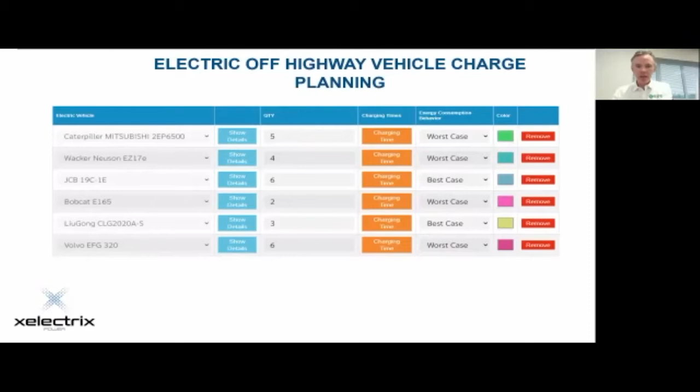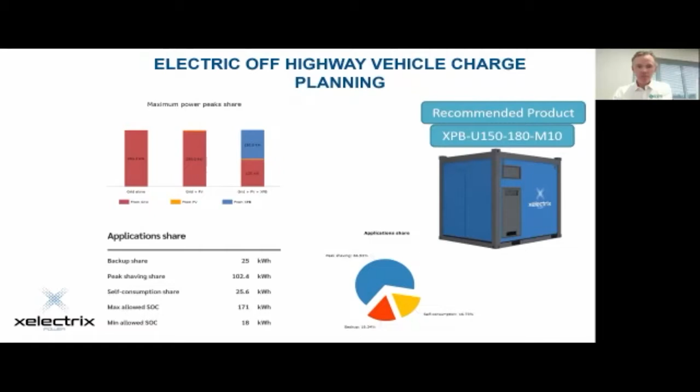As well as carrying out physical trials, another way we can support businesses is using software specifically developed for selecting the appropriate storage solutions for any given application. In this example, we have a business that runs a fleet of electric battery-powered equipment where they need to charge them at specific times of the day, putting a load on their grid that exceeds their current supply. In order for them to support a growing fleet of electric equipment without an increase in grid supply, our software applies this system. From understanding the demand required from each individual machine, we can either produce our own load curve or take one from the client and analyze the data to feed back what size storage system is required to deliver the necessary power outputs to satisfy all charging or powering requirements. From the initial survey and inputting the necessary information, we can produce simple reporting that illustrates the cost saving, payback, and confirm details of the reduction in carbon emissions that can be achieved.

For any business, whether an end user with an existing fleet or someone who wishes to grow their fleet of electric plant machinery and would like some help dealing with the challenges we have covered in this presentation, please get in touch via our details at the end of the slide or look us up via Plant Planet. The move to electrification has started. Let us help you get there.

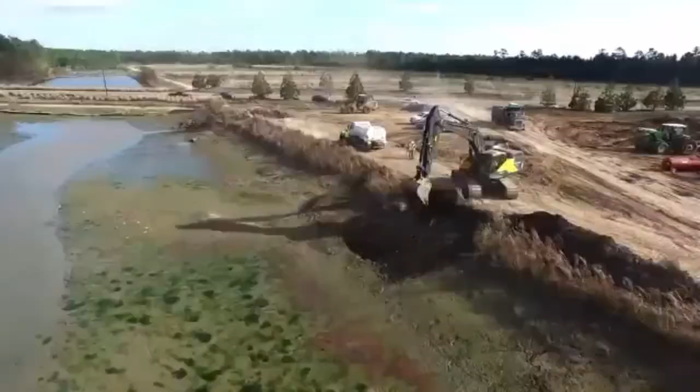Welcome and thanks for joining. I'm Aidan Barnes, Head of Business for SITECH UK and Ireland. SITECH are the UK and Ireland's distributor for Trimble connected construction, site positioning and software solutions, and we support effectively the heavy constructions and civils side of Trimble's product portfolio. We're the leading machine control supplier to the heavy constructions and civil space throughout the UK and Ireland.

And with our integrated construction technology solutions, we work with a really wide variety of businesses in terms of their size, their types, including tier 1 contractors, plant hire, equipment hire, ground workers, earthworks, and rental businesses. And because of the brand agnostic nature that we provide throughout our services and solutions, we're the technical partner of many different organizations of both users and machine types.

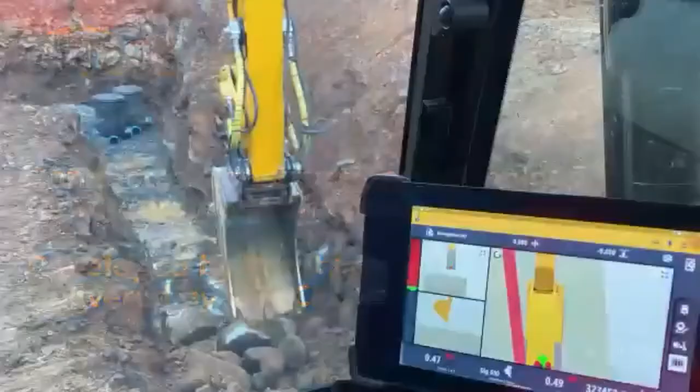So firstly, what are SITECH? What do Trimble provide? SITECH really help customers to develop the technology ecosystems to optimize their work sites in conjunction with their own technology investments and heavy plant or survey equipment. By utilizing Trimble's machine control, site positioning equipment and software packages, in addition to our own professional services or training through the SITECH Academy, we're able to offer the expertise and knowledge base to help customers get the most out of the equipment and the most out of their projects.

Our range of machine control can cover anything from 2D machine control, 3D or 3D automated. This can be on a range of products, whether it's dozers, excavators, graders, milling machine and paving machines. We have a huge, extensive range of product to suit the application, whether somebody's just getting into machine control or if they're really embedded with that technology themselves and are spreading that technology across their own fleet.

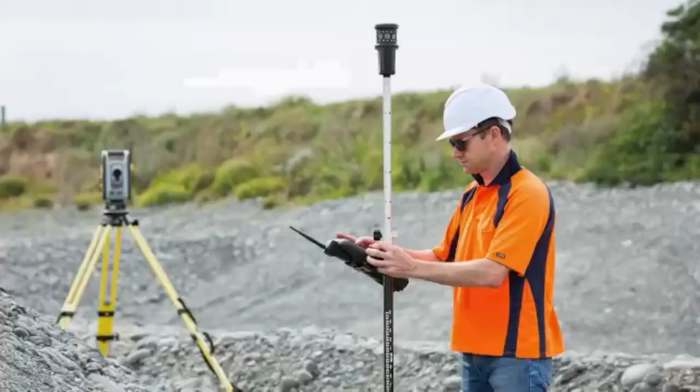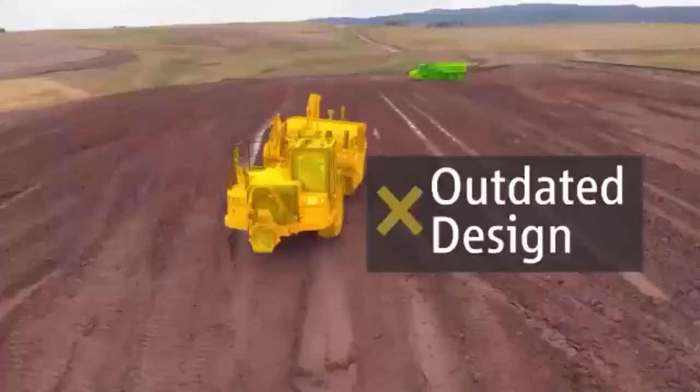In terms of site positioning, we offer a range of total stations, GPS locators, radios, to really make sure that the site can talk to the machine and vice versa. And then in terms of software, we offer a range of both connectivity platforms such as Works Manager, design suites such as Trimble Business Center that helps you design and work your designs to the machine or your machines to send updates designed from the field, then onto Works OS, which is really that holistic package that ties everything together.

So what is a connected site? Well, really, the role of technology in the heavy construction and civil space has drastically changed. Digital transformation, Internet of Things, and data connectivity and data flow is happening right now. So what exactly is a connected site and what does it mean for your construction project?

Firstly, there's no defined term. It can mean anything from machine control on site to a full office-to-field and field-to-machine, minute-to-minute update connectivity solution. We can go as deep as we wish, or we can keep it quite top level.

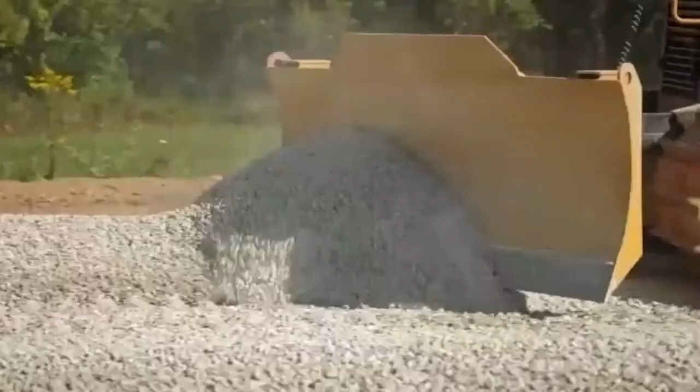It might surprise some people to learn that machine control has been used since the late 90s. But like any technology over the last 20 years or so, it has evolved quite significantly in some instances. Organizations, in our opinion, must embrace it or have to start looking at it if they haven't done so already, really to be able to be competitive in the market.

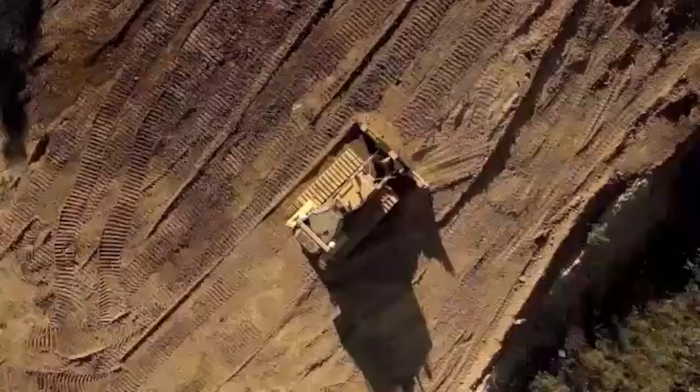Further to how the technology has evolved and the benefit it brings, it's its accessibility. So for many contractors adopting machine control, it's the first step to automation of the work site.

But with the growing pressures across the industry, especially since COVID, and as we've become more remote in terms of our working practices and activity, the industry has had pressure on it to adopt and adapt to these new ways of working, really to get the best out of the efficiencies of the projects, but also people.

Organizations, in our opinion, now must embrace it in order to be successful. And for those that don't, they're starting to see the cost challenges and considerations that must be made. So for many, it's becoming the standard requirement to meet in terms of our clients, and productivity, safety and sustainability.

So to that end, it's not just about adopting one type of digitization—machine control, positioning or software. Whilst it has the potential to meet these challenges, it also has its limitations.

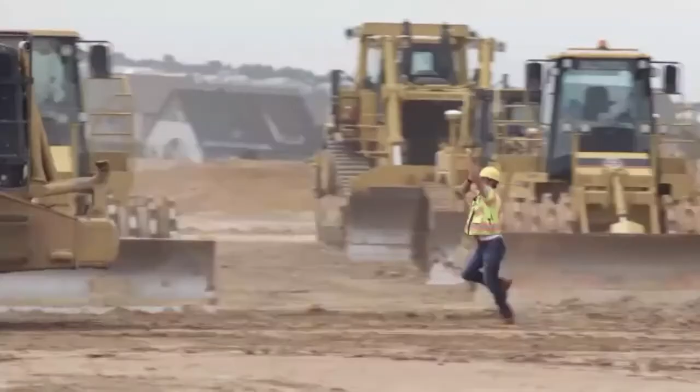So as an example, when we talk about a connected site, the designs can sometimes mean that we have to update machines manually onto each machine. And there's the possibility of those going wrong when wrong designs are uploaded or design changes are out of date—it can cause a problem, with no indication of the error until the work's completed.

Again, what we're seeing in other scenarios is where an excavator is consistently collecting data, which can be turned into invaluable as-built insight. It's simply not being collected or used. So when we do collect it, how are we using it? Are we getting the most out of that data and that information?

Or we see certain customers aren't working to the latest design, or the surveyors and project managers are making changes, so rework's got to be done. So how do we then take those foibles of digitizing and connecting some of the equipment to make sure the entire site is connected, and we're getting the most from all aspects of the connectivity?

Because when we see businesses, surveyors, or designers, or other people really embrace the connected site and move out of their silos, we get past the limitations of the ability to be efficient, to manage the project, or to make the best use of data.

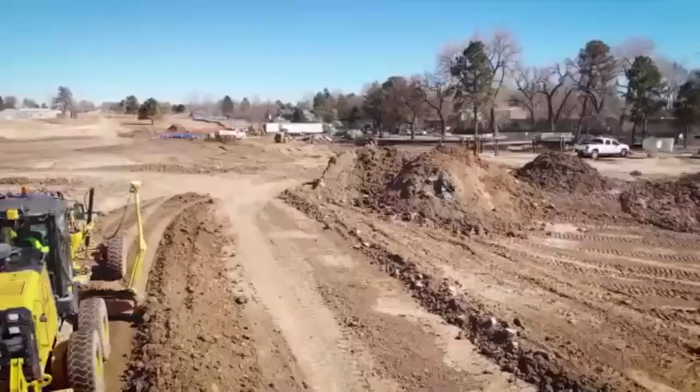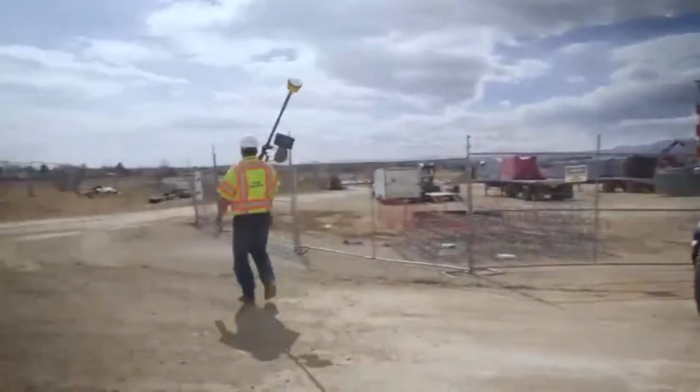So what's the solution? Well, our solution, Trimble's solution, and what we're seeing all our competitors do, is really to make sure we're using construction technology across a connected site to create the integrated work site. It's a concept both as simple but as powerful as it sounds.

So at all phases of a project, all essential team members, whether behind a design desk or behind the controls of the machine, are all seamlessly linked.

So for Trimble, we utilize Works Manager, which connects all the different sites across. Whether it's using GPS 3D, or base stations, or total stations to send data from machine to machine, it gives a seamlessly linked system across the work site to ensure the most current, complete data is available. Everybody's aware of the progress via two-way data connectivity.

That's automatically, wirelessly to everyone at all times. So by connecting the machine control to the workflow management, you can take full advantage of the data generated in the field. The connected site should be viewed as a construction ecosystem, and it really hones in on our ability with data, if used efficiently and smartly, to get the most out of our investment.

Let's be honest, a lot of this equipment isn't cheap, but if we look at the benefits it drives, in terms of cost savings of people, error reduction, wasted material, fuel saving, it really does provide us with the information we need to justify those investments.

It's especially useful if we look at contractors working on multiple work sites or projects. If we need to see everything connected over the site, we can look at job completion dates, when we can move on to the next path, if we need to allocate resources to a different site over and above, or if there's certain things going wrong where we need to put specific specialists into a site in advance to meet the site deadlines.

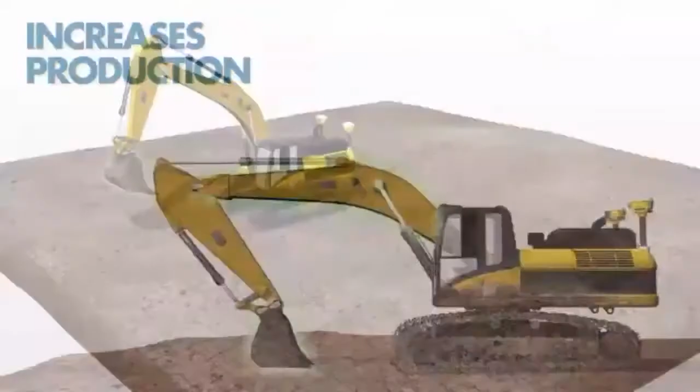And the way we do this at SITECH and Trimble is we build all the equipment and technology from the ground up, dedicated to the construction industry, but with very good knowledge and understanding of both the geospatial aspect and the BIM modeling, so that it's the connection right at the heart of it all, but it transcends throughout effectively from a greenfield site to the actual completed works or project.

A recent study by McKinsey Global Institute around the industry itself suggests that by adding the technology to create a connected construction site, it can reduce the overall project cost by 4 to 6% and increase, as I said earlier, by as much as 30-40% depending on what it is.

The next area is just error reduction. It's a key area within construction, and error reduction is all about ensuring the job's done right first time, every time. And if we look at accuracy and quality, by automating project workflows and delivering the highest possible accuracy for site positioning, setting out, and measurement of machine control, it really does enable us to save on errors.

And also save then on the rework of them, going back to the previous point of time saved, cost saved. With rapid updates of two-way data, we're able to minimize the chance of work being carried out that isn't correct, or if something's changed on that day.

It gives us better visibility, as we said earlier, in terms of the project information, and it's readily available to the office, which can be given to a client in terms of progress update, or even making sure everything's working to plan, or spotting potential hazards or pitfalls.

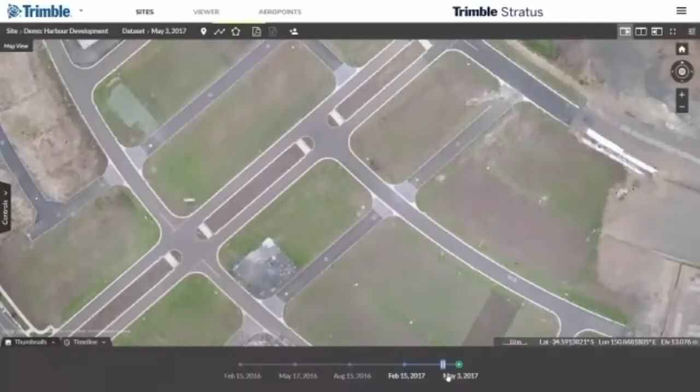And then with the up-to-date insight of data, the data can be used proactively, looking at what's to happen next, or retrospectively, what could have gone well, as I said earlier. So it really does help us drive better, more articulate decisions.

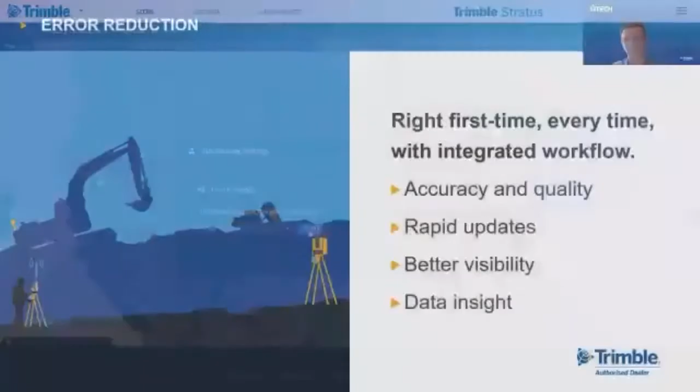On to cost control: another area that's really important to SITECH, to Trimble, and our customers, is our ability to improve the cost efficiency of the projects. If we look at it in terms of estimating, by utilizing the knowledge, we've got less error, we've got more accurate understanding of what materials we'll need to build.

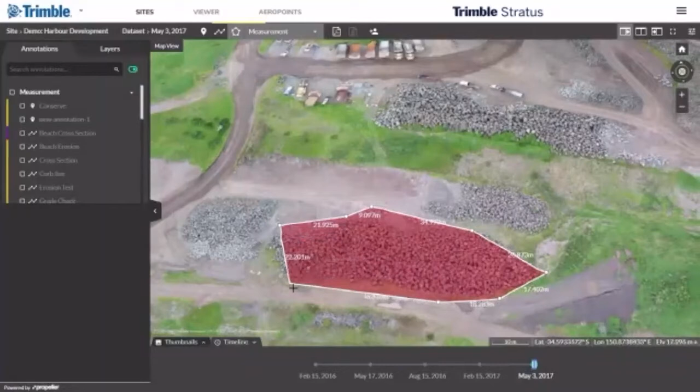We don't have to build in as much budgeting for these deviations or the discrepancies. And it means we can keep on track of budget through the planning and the progress tracking throughout.

Waste throughout the industry is probably one of the key focal areas of the business, and machine control and the connected site really enables us to hone in on that detail. All this then also helps really cut delays.

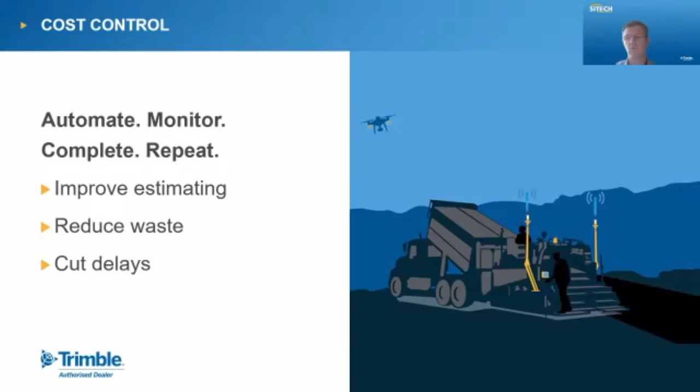Whether it's machine downtime because you've got reduced service frequency, replacement of wearable parts, less overdig, so the job's right first time, it's a much smoother workflow, and the resource planning can be far more accurate than ever before. That's both in terms of the operators, the equipment, and the project. We're far more streamlined throughout all the different components of a project.

And finally, we come to competitiveness. All of what I've said above, all our competition know that we've got a vast array of products, both machines, both site positioning equipment and software. But it's really about how we as organizations, and specifically contractors, subcontractors, plant hire, can become more competitive. It's there to ensure that you're ready to compete at all times and ready for the new activity now.

We need to be able to make sure we can win more work. By being more cost effective, jobs completed on the right time, and using information to stay one step ahead of the project, we can stay one step ahead of the competition.

And with our ability to be more competitive, we've got better margins. So if we look at it, and I use the term 'we' because it is a partnership with our customers and also the technology providers, we're all looking to improve margins. And with better cost control, we're able to better price customers without sacrificing the margins.

Actually, we're all going to benefit out of this, both in terms of the end customer, our operators, the clients, the project managers. It's all deriving around better control. And part of that, quite simply, is just by completing jobs faster.

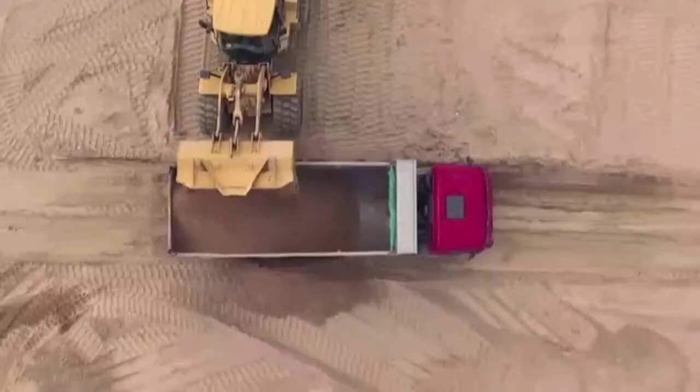If we look at the comparison of a technology job where we've used machine control or site positioning versus those that don't, those technology savvy customers really have seen the improvements that it provides them without compromising on quality. And by embracing this digital transformation that's happening right now, and will continue over the next few years, it's a great opportunity to be within the industry and really take advantage of the benefits that it brings and future-proof organisational success.

So that's just about it from me, and it's probably time to wrap up. But I hope that this discussion has given you the opportunity and the insight in terms of what a connected site can do for you. A connected site is, and really should be viewed as, the contractor's secret weapon for improving productivity, safety, and our ability to compete. So the question to our customers is, what are you waiting for?

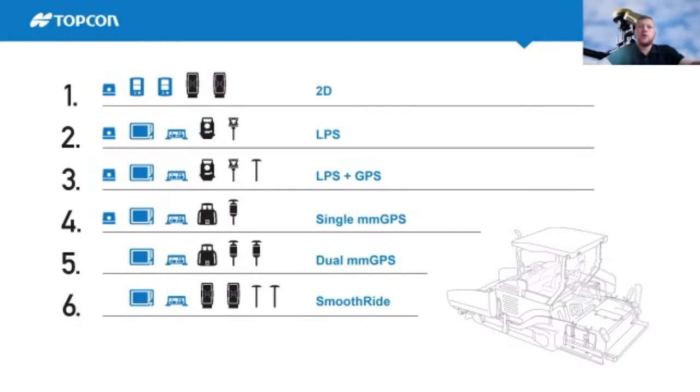LPS GPS is a hybrid of both options between LPS, so total station, and GPS. Single millimeter GPS, which is an exclusive product here from Topcon. Dual millimeter GPS, which is also again an exclusive product from Topcon, and SmoothRide, which I'd like to talk to you about today. That's also an exclusive product from Topcon.

For those who don't know, 2D machine control is a common product in the UK, and it consists most commonly of a 2D sonic tracker. The sonic tracker references to the ground and controls the tow point of the machine, adjusting the level. This is an automatic machine control solution.

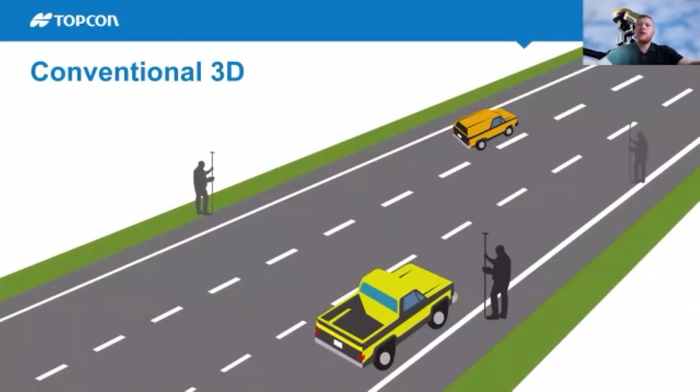LPS machine control, via total station, is the most common 3D choice in the market at the moment. The problem with LPS machine control is the surveying aspect, not only during the paving or milling operation, but also during collecting the data. It means that someone has to be on site during the paving operation and also during data collection with a total station, so during live traffic.

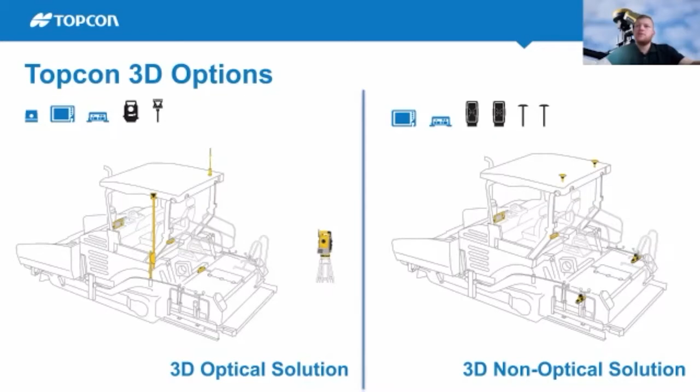The optical 3D solution via total station is on the left and the non-optical solution is on the right. We use GPS position, and with 2D, it's a hybrid option between 2D and 3D.

The non-optical benefits are: no requirement for a total station on the job site, and no on-site surveyor needed. This means we have fewer employees on the site and in between heavy plant. Normally during the paving operation, someone would have to be behind the paver with a surveying kit to verify what the paver is actually laying. We remove all that.

Limited setup of equipment means there's no need to set up the total station equipment - all the equipment stays on the machine. We would just turn the machine on at the start of the shift, and as long as we have a GPS signal, everything works with the conventional paving method.

It also works better in different weather conditions and at night. One of the issues with LPS and optical equipment is it has to have line of sight, and during wet and cloudy conditions it limits the accuracy of the paving and milling operation.

This removes the total station range and obstruction issue. A total station and an LPS operation has to have line of sight, and there is also a range limit to a total station, so if we have an obstruction issue, it can cause problems for the machine. We remove all that with Smooth Ride.

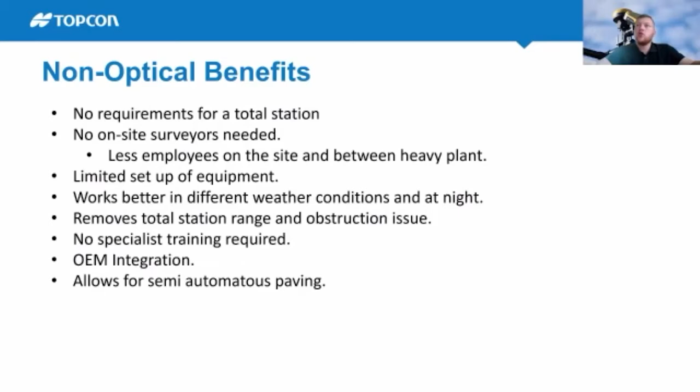This allows other operators on the paver or milling machine to do other jobs - whether that's keeping them out of harm's way off the site, or allowing them to operate other bits of plant on the job site - which enables semi-autonomous paving. I can talk to you more about that further in the presentation.

So really for us, what are the benefits to profile planing and profile paving? We get a smoother road for the road owner, a smoother IRI, International Roughness Index. That removes extensive pressure to the asphalt, causing an irregular surface, and increases the lifespan of the road. So if we can increase the smoothness, it's less pressure and less wear on the asphalt, and it's also less wear on the vehicles traveling over it.

Strategic planning - scanning can be done without road closures and at night, and I can talk to you a little bit more about the process and what we can offer.

Scan data allows for analysis of the current condition of the strategic road network. Scanning can be done at regular intervals, so we can see deterioration of roads, and we can also see potholes, and then create a strategic resurfacing plan based on factual data - rather than ripping up perfectly good roads.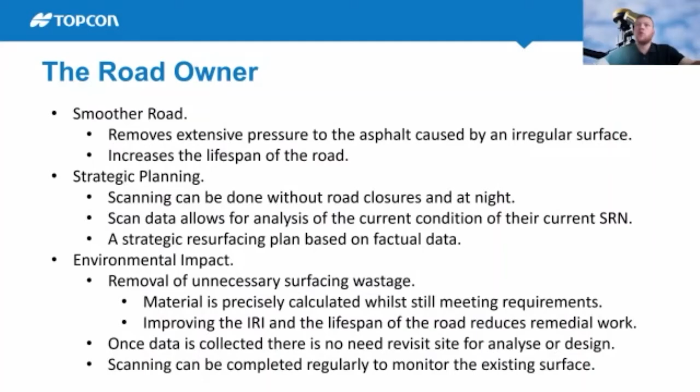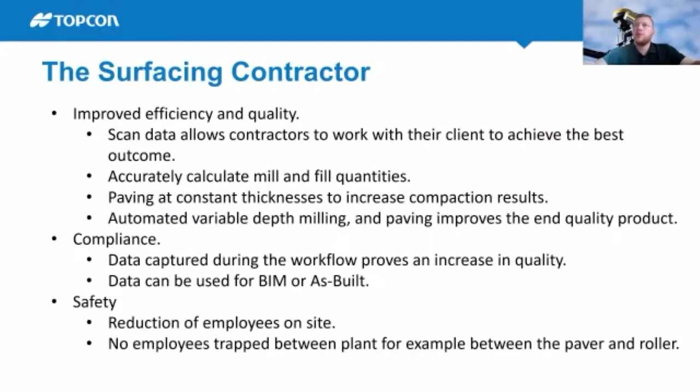Safety - the reduction of employees on site, which is a key perspective for safety. No employees trapped between plant, for example, between the paver and the roller. Conventional methods need someone to be in between that paver and that roller, which we want to reduce and remove.

So for the consumer - that's all of us, everyone that drives on whether it be a Highways England strategic road network or a council road - it's a smoother driving experience, a safer driving experience. There's been multiple occasions where IRI is taken to a dangerous level on some of the strategic road network, and we want to be able to remove that.

Improved MPG or distance for electric vehicles, which Highways England are severely keen to promote and push, as electric vehicles are a lot more common now on our roads, and they want to get the most miles per charge. One of the prime factors is improving the IRI, or the smoothness, leading to less wear on the vehicles, suspension and drivetrain.

Less road closures, which is a key point. Our workflow allows us to collect the data during driving speeds, which means that there's no need for road closures.

So what is Smooth Ride? Smooth Ride is a workflow. It starts from data collection to design to milling or paving, compaction, and then back to scanning.

I've just got a quick video that I'd like to run through.

The first requirement is to get an accurate depiction of the road surface. Our road surface scanner gathers a precise map of the entire surface at normal highway speeds, collecting the data you need with more information than a survey crew could provide.

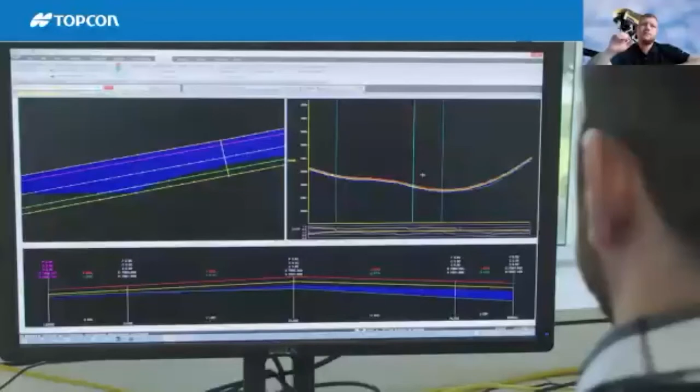The next step is to create a design that meets the tolerances and specifications required. Optimizing and customizing the millions of data points necessary for creating your design file is made easy with Magnet Road Resurfacing software.

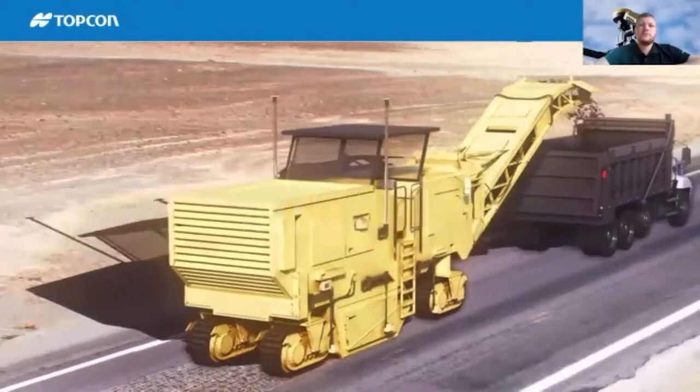Once the design is created, it is sent directly to your equipment, allowing milling and paving to begin almost immediately. Equipped with our 3D machine control, the milling machine knows its position on the road at all times.

With automated, variable depth milling now a reality, you can mill to the exact depth necessary, creating perfect mill-to-fill optimization and the smoothest surface possible for your paver to follow.

Material costs can quickly turn profit to a loss. Paving with Smooth Ride assures rideability while eliminating waste and cost overruns. By managing your material properly across your entire project, you'll never be too thick or thin.

Utilizing the same job files generated for your milling and paving machines, operators know exactly when and where to compact, which prevents over-compacting and increases efficiency.

Advanced temperature sensors inform the operator exactly when to begin, and the touchscreen control box keeps track of how many passes have been made. As your compaction processes are in action, your rollers are gathering as-built data on the road surface. As more DOTs require intelligent compaction standards, Smooth Ride will keep you miles ahead.

So that's just a quick overview of what Smooth Ride is in the workflow. As we mentioned, it's a hybrid between 2D and 3D machine control.

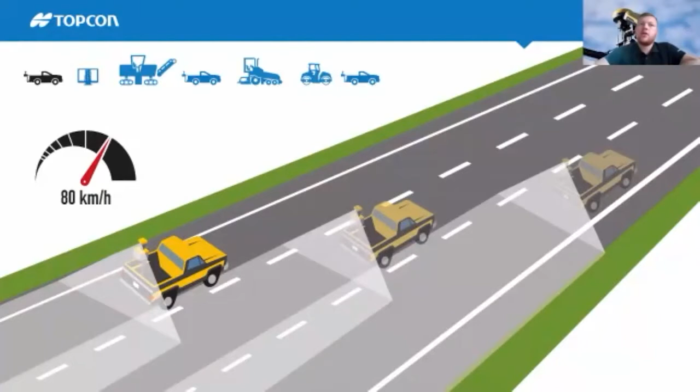So we can scan at 80 kilometers an hour, which is about 50 miles per hour, and that can be done in lane 1, lane 2, and lane 3 of a motorway, for example. So we can keep up with traffic, and our data that we collect can be automatically filtered to remove things like passing vehicles.

And whilst we're collecting that data, our software allows you to see a really good picture of the data that you've been collecting. So if you miss a particular point or a particular spot, you can go back around and collect that data again.

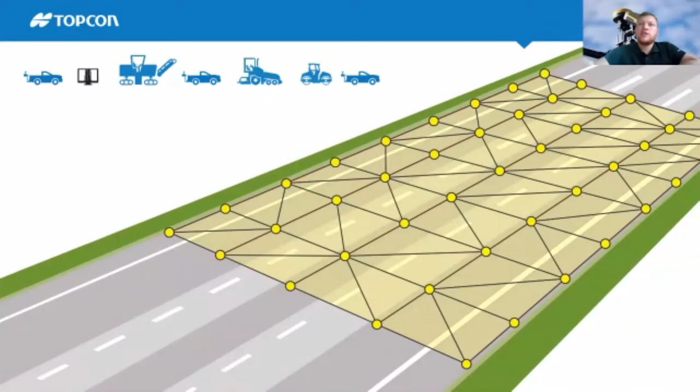Out of those millions of data points that we collect, we create what you call a DTM, which is a digital terrain model. And from that digital terrain model, we then create a design, which goes directly into the milling machine or the paver, depending on which is the most likely option for the client or the contractor.

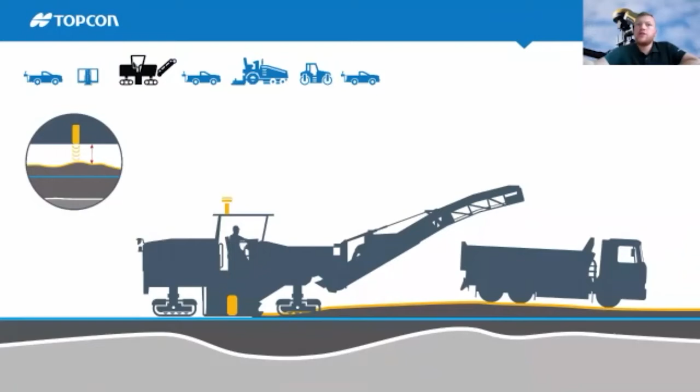So once we have that milling operation or that design, we do what we call variable depth milling. This allows us to create a completely flat surface ready for the paver to then lay a nominal thickness over the top, and it's becoming very, very desired in the market.

Once we've variable depth milled, we can then scan the existing, milled surface again, and go back with smooth ride paving. Or, as I mentioned, sometimes we cannot always be in control of the milling operation.

We can scan the existing surface, whether it be an undulated surface, and then we can variable depth pave back, which gives very similar results, if not better than an averaging beam.

And all this time, because we have the existing surface, our software allows us to tailor the requirements so that we don't overcompensate on material.

As mentioned in the video, once we have the data that's been collected, we can put that into the compactor, and the roller will then say exactly where to compact and where not to compact to meet the full requirements.

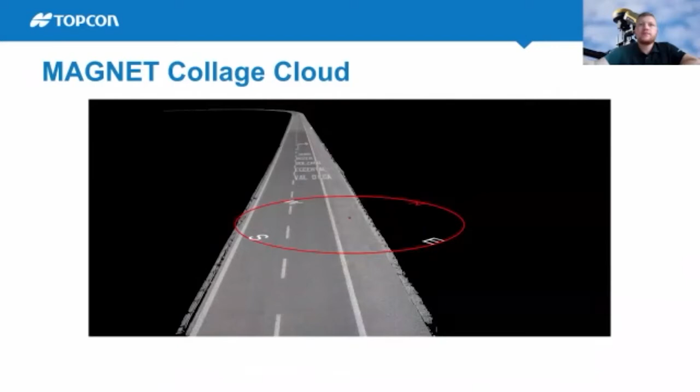As I mentioned, we put that into a DTM. So that's the DTM from that point cloud.

And then we put that into our Magnet Office resurfacing. Our Magnet Office resurfacing is a really good software. It gives you plan view, profile view, and cross section, which is really important to be able to look at cambers, water drainage, etc.

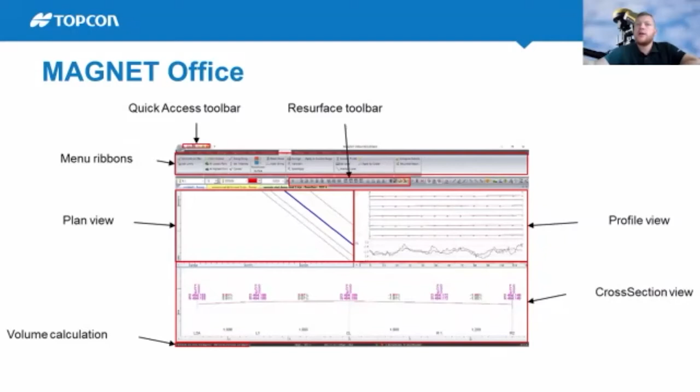All the time that you're making these tweaks and specifications, in the bottom left-hand corner you can see the volume calculation. Every adjustment you make to the milling or paving design will change that volume calculation.

We can set limits. So from certain chainage A to chainage B, we can set minimum and maximum thicknesses - what the operator wants to mill or fill, or what the contractor wants to fill. This is massive for minimum depth requirements, and this process can actually prove minimum depth requirement and what's able to be offered, making sure the contractor meets the client's specifications.

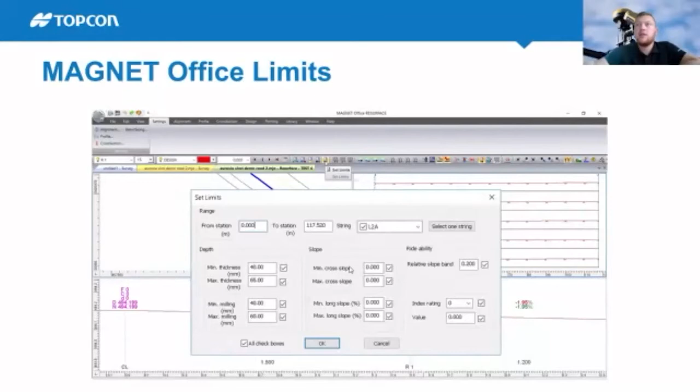We can offer cross slopes and cross falls as well that can be automatically milled or paved via profile planing or profile paving. So if we have a particular area where we want to change the camber or cross slope of the existing road, we can do that all in the software.

Once we've done the milling design or paving design, we can move straight onto the report. We can get a mill and fill quantity report that can go either to the contractor or the client. It allows us to offer the contractor or client the right specifications to the right tonnage.

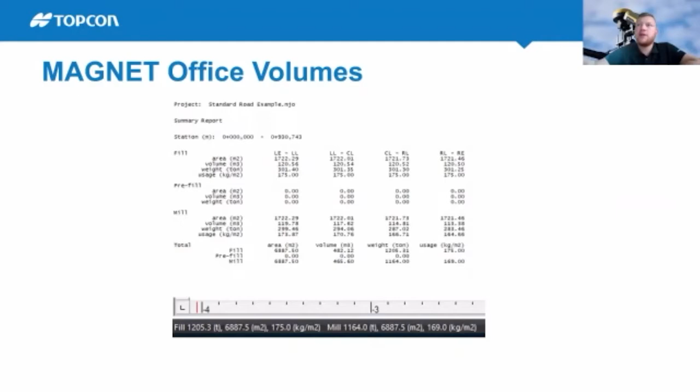If there is an issue with the existing road and the contractor doesn't know about it, when you take the scanner out and scan that existing surface, we are able to explain without visiting site what the issues are, where they are, and what we need to do to change it - whether that's more material or a change in client specifications. We can do that without even stepping foot onto site, which I think is a massive benefit to the client and the contractor.

So really, that's all from Topcon on the Smooth Ride. Thank you very much for listening, and I will be at the conference, and I look forward to answering any questions you may have. Thank you.

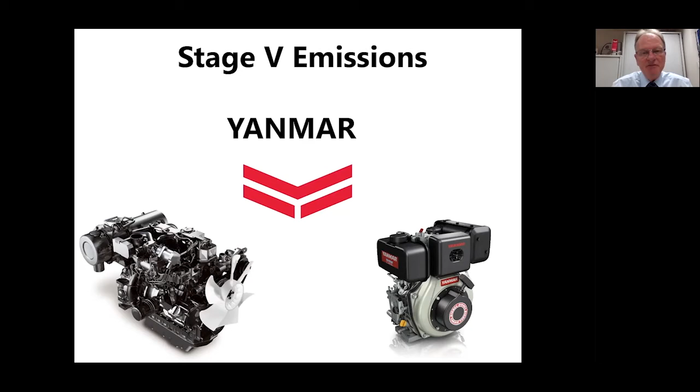The Yanmar range is made up of two sections. There's the air-cooled range, which is the L48, L70 and L100, going up to 6.8 kilowatts from 3.4. Then there's the water-cooled range, which goes from 8 kilowatts up to now 155 kilowatts with the recent additional engines added to the range.

The L series engine, the air-cooled engine, is used on many applications on building sites, from cement mixers to generators, power packs, pumps, a whole myriad of items, but very popular on building site applications. The three engines are the L48, which starts at 3.4 kilowatts, the L70 being 4.8, and the L100V being 6.8.

The Stage 5 emissions came into being in January 2019, and it's the first time that engines below 19 kilowatts in Europe were affected. The main effect was on particulate matter levels, and the engines had to be modified to try and meet that level.

The range of engines up to 56 kilowatts was affected in January 2019, and 56 kilowatts and up was introduced in January 2020. Of course, the emission levels in the States had already been in place for some time.

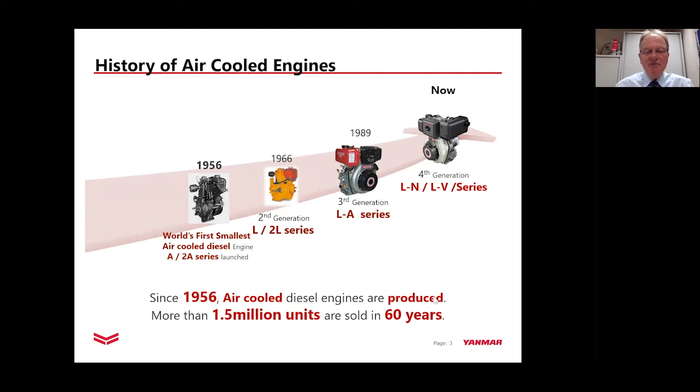From the LA series, introduced in 1989, to the LV as we see it today, a lot of the engine development was internal, with the external footprint remaining pretty much the same. But I shall explain as we go through. As you can see, many engines have been produced in the last 60 years.

When you think of where it's come from, and when the engines were around in the 1980s, which is when the CARB regulations first came in, the emission levels we meet today are something quite significant. At the time, I'm sure nobody dreamt the engines would reach the emission levels they are today. So with more than 100 years under their belt, I think Yanmar have got some good experience behind them.

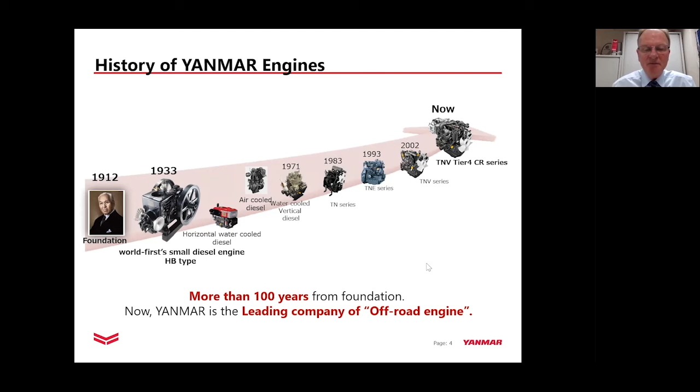L series features: the engine is pretty standard. The direct injection system has been with Yanmar air-cooled engines for many years, and is a big part of what is happening today. The internal changes have been with the piston design and the injection porting, etc. So a combination of things, but Yanmar are in control of their own injection system, which is quite unique and has helped them develop something which meets the Stage 5 levels today.

On the L70 and the L100, the two bigger engines, there is no DOC arrangement. It's all internal. There's an EGR system on there to assist with the combustion system. There are various other things as well that have been done that you can see from the inside of the engine, not necessarily from the outside.

The L48V, the smallest engine in the range, has a DOC diesel oxidation catalyst within it, and I'll show you that detail shortly. The engines are also complete with a counterbalance arrangement, which enables the engine to keep smooth during operation.

Yanmar, as I mentioned, has had their own direct injection technology since 1980, and is probably one of the only diesel manufacturers that is in charge of its own fuel equipment in-house. This, with the combustion design, gives maximum efficiency controlled by Yanmar, and with their own injection system, it enables them to control everything.

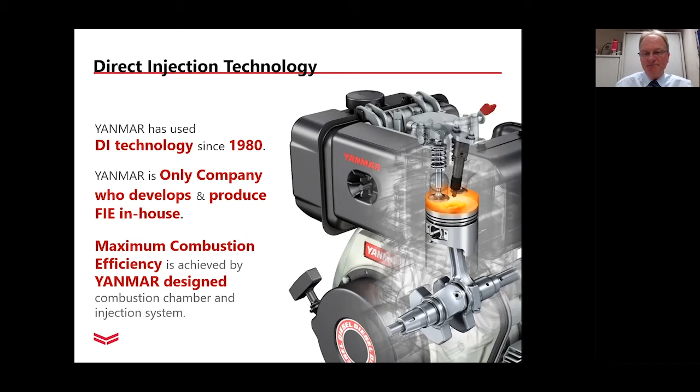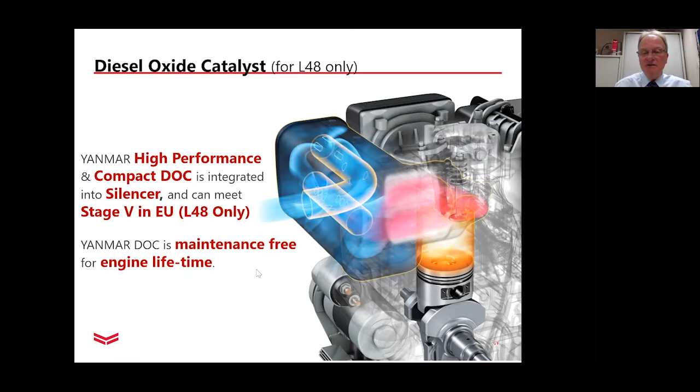But Yanmar's DOC is maintenance free. It's an engine for life design, so that should stay with you until the engine finishes its time. So there's no filter in here, there's no extra maintenance. It's just a bolt on, and it's dead easy.

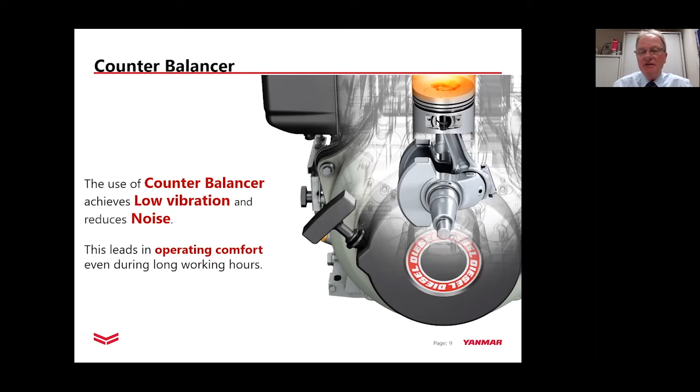The counterbalance, part of today's requirements is the smoothness and operator comfort. So the counterbalance side arrangement here gives low vibration and low noise levels.

So what are the advantages? Well, the direct injection technology gives you good fuel economy and total cost of ownership being down as low as possible. The engines are very simple design, and as I mentioned, there was minimum disruption going from the LA up to the LV over the years. So simple design, easy to install and maintain.

Yanmar has always been at the front with technology leadership to meet the emission regulations, as shown above there, the DOC being part of that. And the counterbalance arrangement, as I mentioned, generates the low noise and operator's comfort.

The features on the engine are easy access to adjust and replace. Everything is on the outside basically. So you'd have a fuel limiter control, speed control, high idle setting, fuel injection nozzle, and fuel injection pump, all available to be maintained from the outside of the engine and accessible from the outside of the engine.

As I mentioned, the other change internally is an EGR, which is on the L70 and the L100. But basically, the design has remained simple and maintenance friendly. So this is the key driver of Yanmar, to stay as minimal disruption as possible.

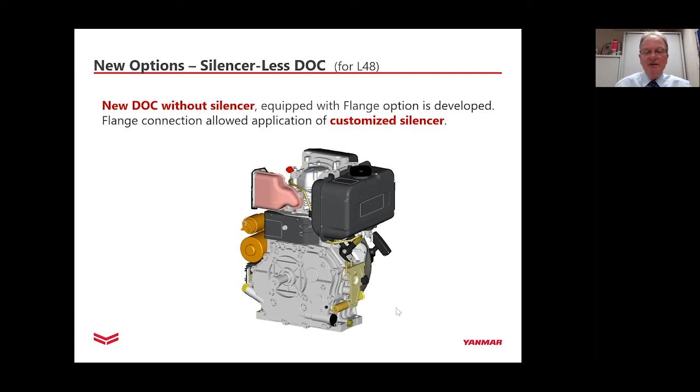There's two differences between the engine. Again, the footprint, the basic design of the engine, very little effect.

So TNV, the water-cooled stage 5, slightly different. The range, as I mentioned, goes from 8 kilowatts to 155.

Emission regulations, just to remind you again when they came in, again, starting in January 2019.

Now, the particulate filter is mandatory to be able to use to control the particulate levels. So that's why it's introduced as standard on engines above the 19 kilowatt side. Cooled EGRs, that's again part of Yanmar's design. And of course, with the ECUs and all the sensor controls there are in the engine to make sure that it's maintaining its limits, or continue being monitored.

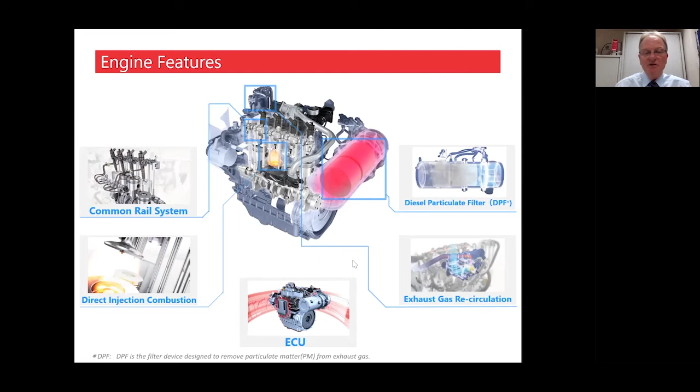So with these modern engines above 19 kilowatts, you get a regeneration system. There are 3 steps in that regeneration, which I'll talk about shortly: the assist, the reset, and the stationary.

The air management control system, again, there's EGR mapping, all the sensors mapping the EGR rates and ensuring that the engine is maintained to a certain level.

Also, with the particulate detection, the calculated method means the sensor is controlling the figures and telling the ECU what to do. The pressure method, of course, as well is when it gets into the filter. As the filter gets clogged, you will see the pressure differential, and this will tell the ECU what to do.

With the engine controls, the direct injection combustion system, as mentioned, with anything above 19 kilowatts - below 19 kilowatts, Yanmar is using indirect injection, but for this technology in the bigger size engine, this in conjunction with the common rail system is used.

The other feature that Yanmar is quite unique in is that on the machining of the cylinder block, there is a system where this item simulates a head, so the cylinder is under combustion pressure when they're machining it. This gives you a much better, tighter tolerance.

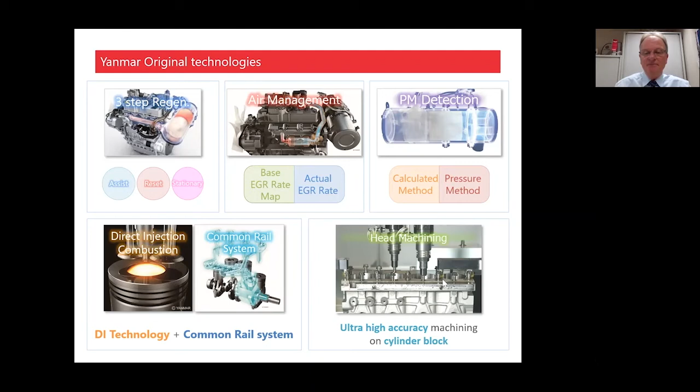Returning to my comment on the regeneration, basically as the engines perform through their life, particulate matter and soot will build up into the DPF. All the time that the engine is running, the operator will not feel this - this assist regen is happening all the time seamlessly in the background.

Basically what it's doing is ensuring that the engine maintains an exhaust temperature of 350 degrees, controlled by an air intake throttle. As the engine is lighter loaded, the throttle will operate, sensed by the ECU, to try and maintain that engine at that level. This prevents oil dilution and promotes low fuel consumption.

The reset regen, again happening in the background, the operator won't know anything about it. This happens approximately every 100 hours to ensure that the soot is cleared - a major clean session at that 100-hour point when the engine goes up to an exhaust temperature of 600 degrees, using post-injection assistance, which will give you a complete regeneration. Again, both of these will be running in the background - the operator will not realize.

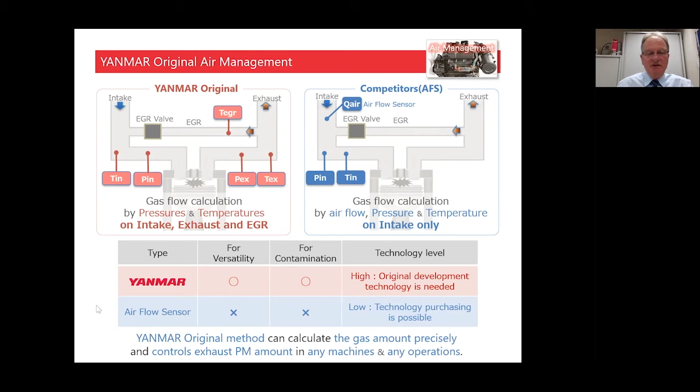So as you can see, Yanmar's technology is slightly different to some of the alternatives on the market. Moving on to the original calculation with the EGR flow calculation - as I say, there's many hours of field testing done to ensure that this system works very, very well.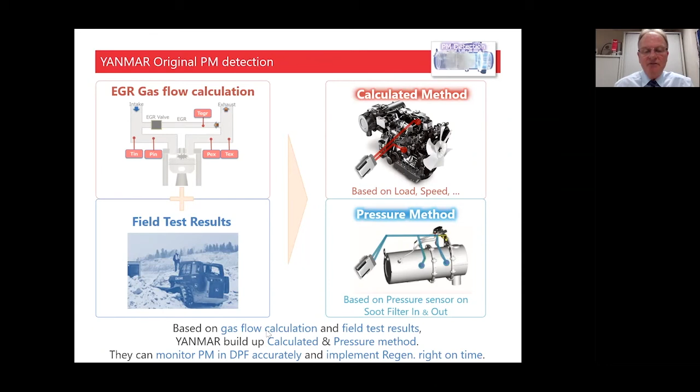The calculated method, again, is taking all the sensors into its control - loads, speed, all maintained with the ECU. The pressure method sends information back from the sensor that controls the soot filter in and out. So based on fuel and gas flow calculations and field test results, the Yanmar engine has been produced as it is today and can produce the regeneration on time.

As mentioned, the DI technology is still there on engines above 19 kilowatts. Below 19 kilowatts, it's IDI. Below that, Yanmar is still doing its own fuel equipment because the engine is still mechanical below 19 kilowatts, but meeting the Stage 5 limits. This again uses a standard fuel equipment arrangement that you would see used for Stage 3A.

Using ECU control since 1989 in the early stages of Yanmar technology, but for stage 5 it's mandatory above 19 kilowatts. This, in combination with the common rail and fuel injection system, enables us to meet the stage 5 limits, with superior fuel injection control giving the ideal economy and optimized combustion.

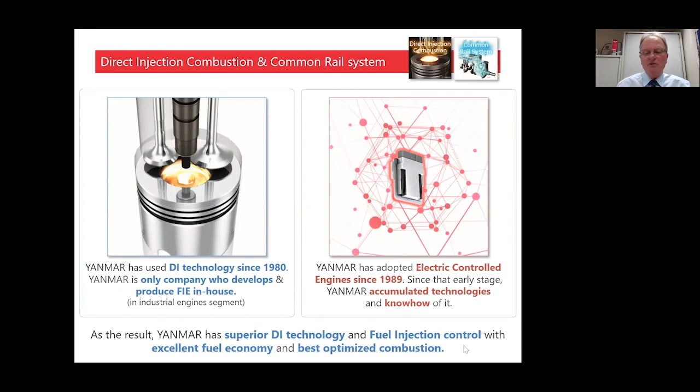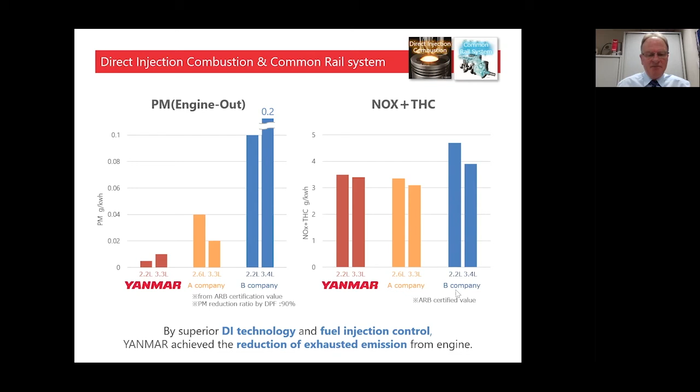This gives you an idea of some of the particulate outputs. Yanmar is extremely low in this area, with NOx and hydrocarbons also controlled into a very low output. So basically, reduction of exhaust emissions across all those inputs.

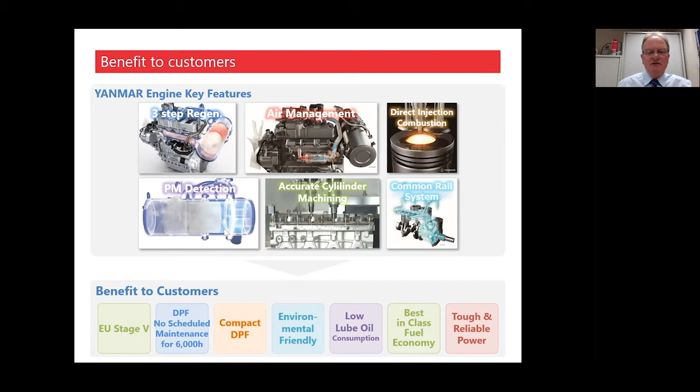And prevents oil dilution while giving durability and reliability. Benefit to the customer: you have the three-step regeneration, as we mentioned, the air management control, direct injection, the particulate detection, the machining as mentioned, and the common rail.

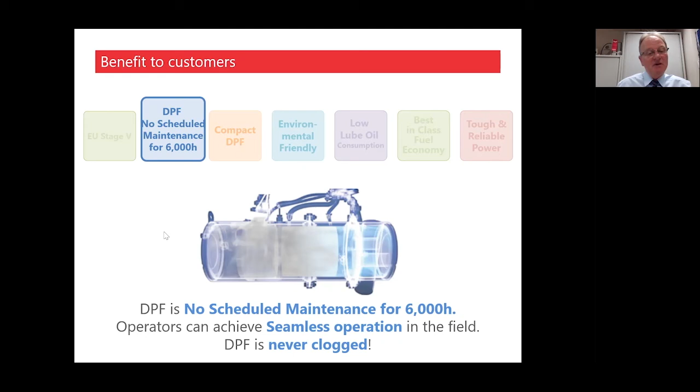First thing, to meet the industrial levels, that's the first point, and also final tier 4 for the USA. So engines above 19 kilowatts are good to go for stage 5 and final tier 4 in the USA. The DPF fitted in this arrangement is good for at least 6,000 hours and maybe more, which actually in many pieces of equipment is possibly the lifetime of the engine.

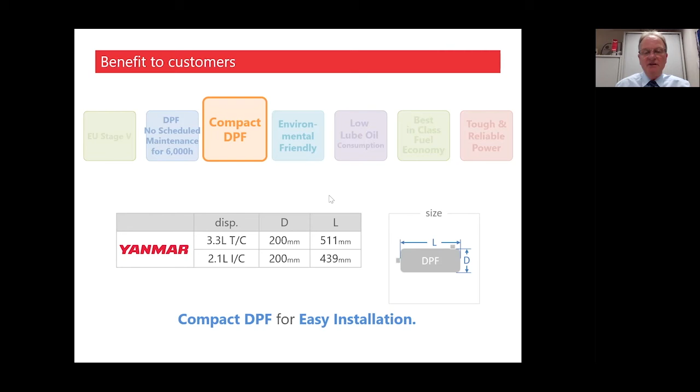The DPF is compact, so you can see the dimensions typically here on these two, the 3.3 litre and the 2.1 litre, which again, going from stage 3A to stage 5, the installation into various vehicles and applications needs to be as small as possible, because it is a challenge.

Environmental friendly, again, this is one of the key things we're all driving towards. So there's an advantage, and of course the low lube oil consumption. It's quite interesting, going from stage 3A up to stage 5, the reduction is from 50 to 70%. So it's quite a drastic reduction in the oil. But with all the other things mentioned as well, it means that with the DPF, you get low ash and low emission.

This gives you the lineup arrangement for Europe for stage 5. As you can see here, below 19 kilowatts, the engines highlighted in green are indirect injection, but still mechanical. The two here in blue are also mechanical, but they're DI engines. Anything above the 19 kilowatt range has that full system of EGR, DPF, DOC, and common rail.

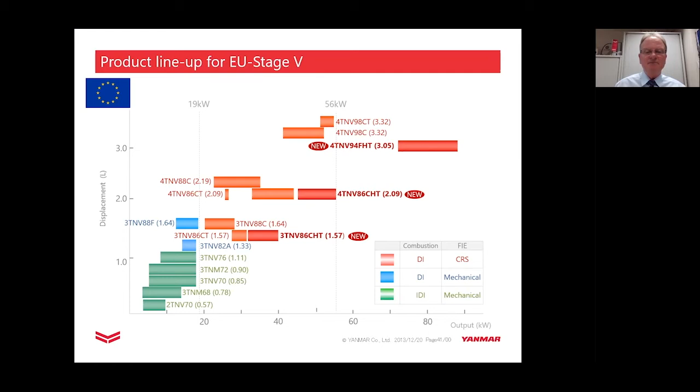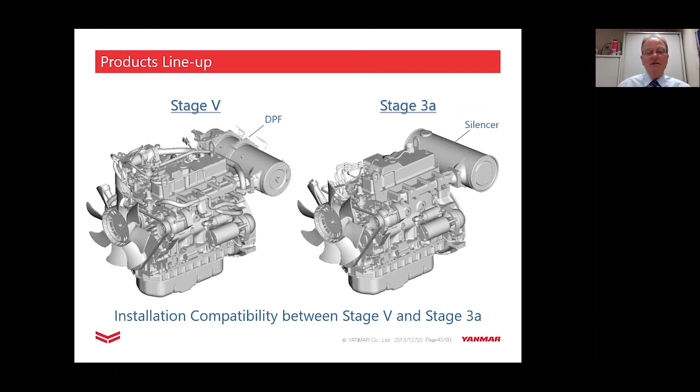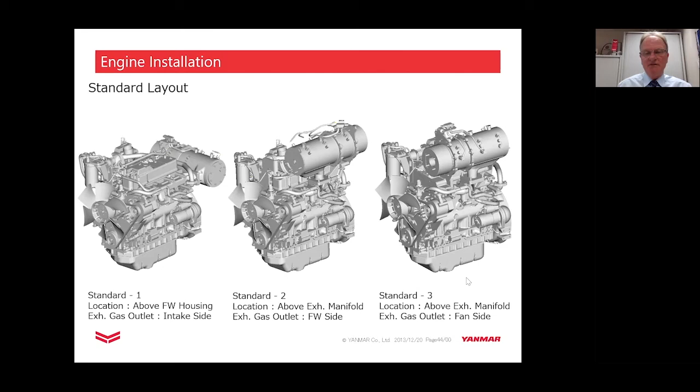Other options we have to this standard layout are having the DPF DOC above the exhaust manifold on the flywheel side, and the other option being fan side, which gives you two extra options for the installation.

There's one other option as well, should it be required, where the DPF DOC is fitted remote. It's better to be as close as you can to the exhaust outlet to maintain the temperatures, but Yanmar with their system, with the throttle valve and everything, this is a possible option if required.

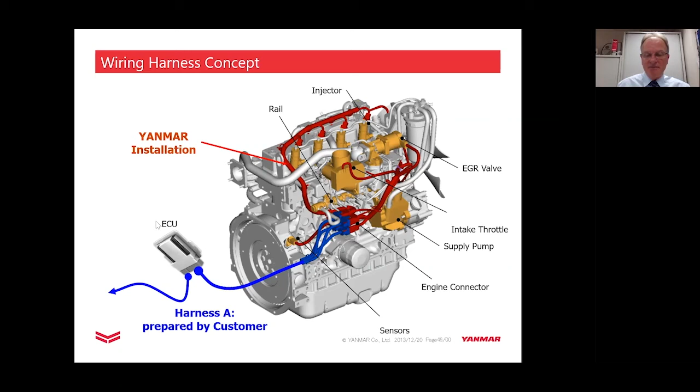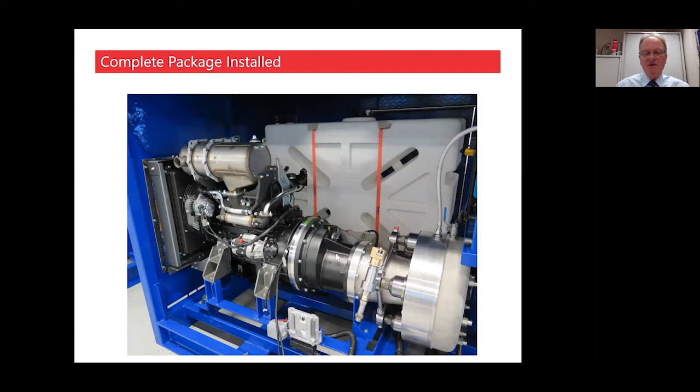So to finish off with, Yanmar have now gone one step further. They've introduced a 5-year warranty, 5,000 hours, which I think is a fantastic move forward. And this applies to the TNV Stage 5 engines, which have been released since January this year.

If you need more information on this, please come and talk to us. But this certainly for me is a statement from Yanmar that they have confidence in their engines and will be standing behind it. And also with the new technology involved, it should take away some of the concerns of the end users.

So I hope this has just given you a bit more insight, and hopefully this will enable you to understand a bit more about what Yanmar have done to meet the Stage 5 regulations. So thank you for your time, and I look forward to hearing from you in the future.